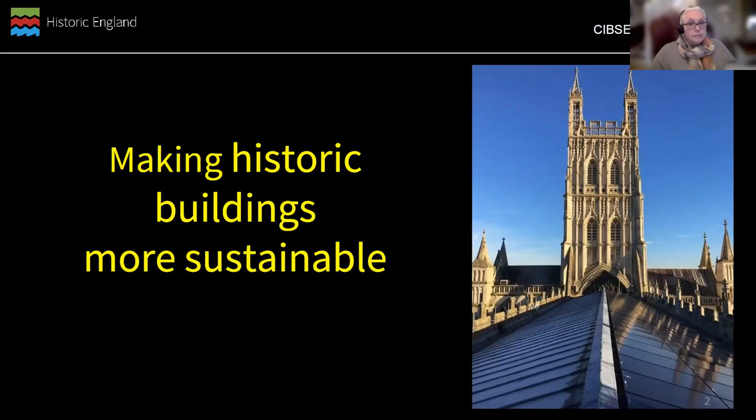The quick fixes can be as simple as changing the lamps in the lighting installation to LEDs. Other considerations, such as the suitability of the lighting design and the age of the installation, should also be taken into account. But this is generally one of the quickest, easiest and most economical alterations that can be made to a services installation that has a positive impact and saves energy.

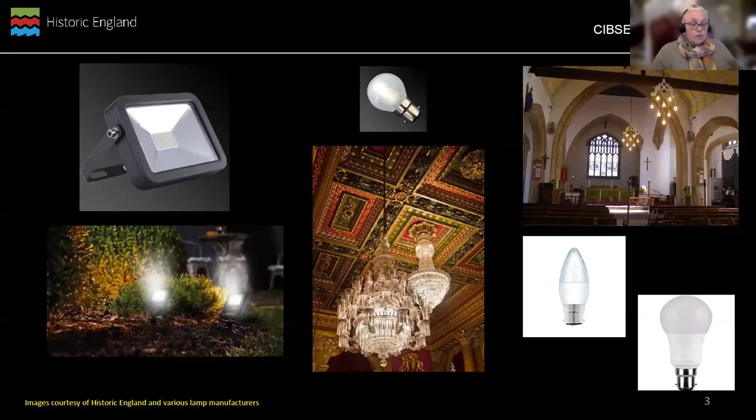Careful thought, however, must be given to where the LEDs are sourced from. As with most things, cheap is not necessarily economical. Some years ago, inexpensive imported LED lamps proved themselves to have characteristics that adversely impacted some people, and sometimes the issue was as simple as having a shorter operating life. There are people sensitive to the imperceptible flicker that some LEDs have. This can cause migraines, nausea, and is not something that can be seen with the naked eye. Instead, the non-visual receptors at the back of the eye detect the problem. It was found to occur more frequently with cheaper LED lamps. This was becoming quite an issue for some churches when they started to install LEDs and were losing congregation numbers because of it. So, purchasing LEDs from a reputable supplier became the standard advice in the early days.

The win is even greater if the electrical supply to the building comes from a sustainable source, potentially including that of the building's own photovoltaic panels.

Yes, a lot of listed buildings have photovoltaic arrays on their roof. Historic England have never been against these. We normally ask that they be concealed from the main views to the building and not installed on the main elevation. Grade 1 listed Gloucester Cathedral has them as one example, as shown on the right of this slide, as part of their Project Pilgrim works.

There were, of course, other considerations to this sort of installation, such as ensuring the often centuries-old roof has the integrity and strength to take the load of these panels, and that there is no imminent need for roof repairs. Also, there must be safe maintenance access to the panels and a suitable home found for auxiliary equipment within the building or adjacent structures.

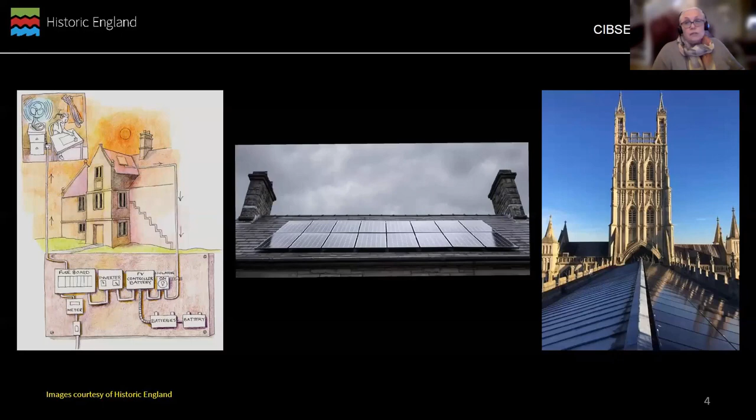Heating is another major consideration and the one that has the potential to be far more complicated and problematic. Gas and oil-fired boilers supplying a wet radiator system are a favourite form of heating in this country.

These types of boiler are, however, falling out of favour as climate change becomes ever more of a factor when deciding which technologies to use and when you replace heating systems as they come to the end of their working life. In a lot of remote places, you will often find listed churches and houses where oil-fired and LPG boilers have been the only option for many years, as the national gas network never extended out to their locations. Replacing one oil-fired boiler with another is now not the first option that should be considered, due to both the Church of England's decision to be carbon neutral by 2030 and the UK's by 2050.

So what are the alternative options available in such cases? In addition to PVs, which could be used to supply electric heating, the grid is rapidly becoming carbon neutral, and according to the National Grid Electricity Systems Operator's Report, it should achieve that in just 4 years' time. So consideration of electric heating is one option, either by electric boilers or other forms of direct electric heating, such as storage heaters, radiant panels, etc., depending on how the building is used. However, there's no point in heating a church 7 days a week when it is only used every second Sunday of the month. Also, systems such as radiant heaters will only warm organic materials, humans included, and not the building, so there may be issues with condensation and damp in the long run.

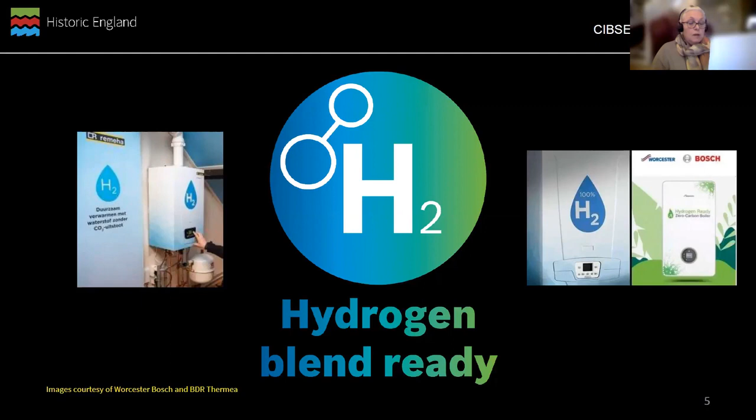There are also ongoing discussions as to which is the better form of hydrogen, be it produced by thermal chemical processes, which use methane in natural gas with a byproduct of carbon dioxide, or when it is produced by the electrolytic process using electricity to split water into its component molecules of hydrogen and oxygen. The first is referred to as blue hydrogen and the latter green hydrogen. Many people are now considering that blue hydrogen is not a true green alternative.

Next slide, please. There is, of course, heat pumps to consider. Whether air, ground, or water, they are becoming a popular option, sometimes needing a small boiler as a backup, depending upon the application. Churches are, in a lot of cases, amending their traditional layout and removing their pews and installing underfloor heating, for which heat pumps are a suitable heat source.

These alterations are often because churches are employed for more additional non-ecclesiastical uses these days, and often need a more flexible internal layout to allow that to happen. These are often musical concerts, plays, creches, indoor farmers markets, and yoga classes, amongst others.

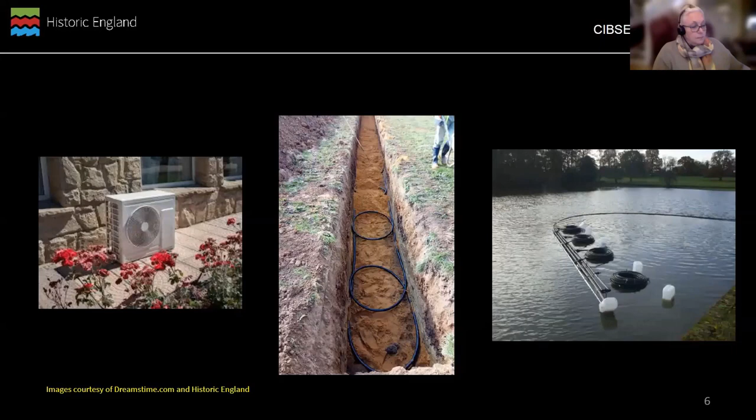Next slide, please. As long as a building remains in use, it can be employed, as we see on the right-hand side here, which is the Shrewsbury Flax Mill, which is being converted into offices. Otherwise, it will go shortly into decay, as shown on the left building, and will rapidly probably have to be pulled down. So it's in all of our interest to keep heritage working for us, and building services helps to make the suitable changes to the building to enable it to go forward into the future for everyone to enjoy.

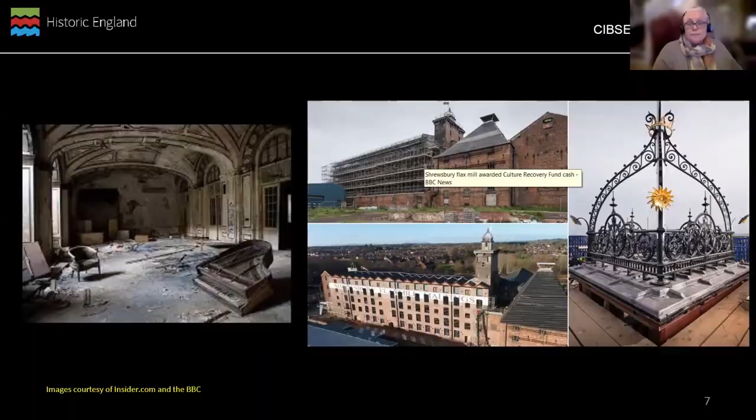Thank you. Thank you very much, Geraldine. It's really interesting to learn the church set itself a net zero goal by 2030, and to understand in the context of historic buildings just the challenges that face them. So I'm sure there'll be many questions coming through for you.

So now we move on to Tina Fawcett. So Tina, please, can you share your slides? And while Tina's doing that, I will introduce her to you. So Tina Fawcett is based in the Environmental Change Institute of the University of Oxford, and her research concerns energy use by households and organisations.

She uses a multidisciplinary approach to understand current use patterns and to identify opportunities and policies for reducing energy use and carbon emissions. She leads the Policy and Governance theme in the Centre for Research into Energy Demand Solutions, CREDS. Her research work within CREDS focuses on policy for further, faster and more flexible delivery of energy demand reduction, particularly in relation to the energy use of buildings.

She also works on the Energy Superhub Oxford, a large demonstration project trialling smart local energy systems, Benefits, a project on the multiple benefits of energy efficiency for businesses, and the EPSRC network for the decarbonisation of heating and cooling. Tina, thank you for giving us your talk.

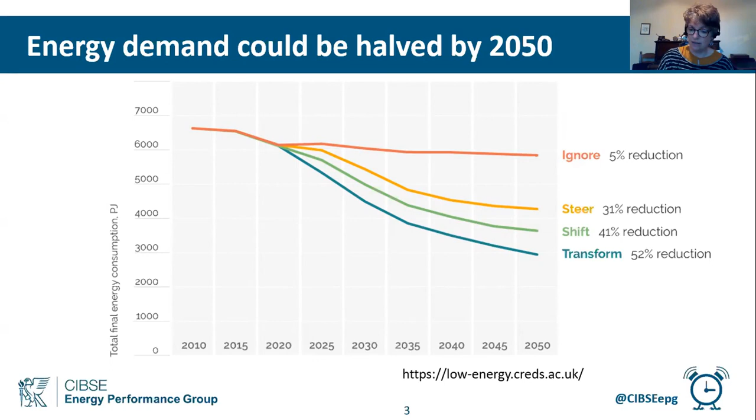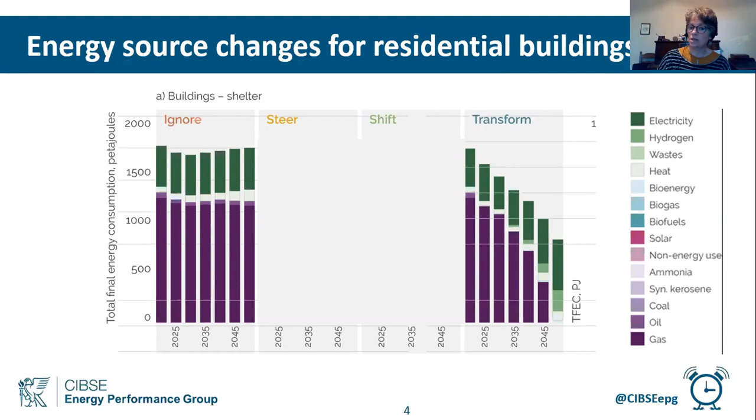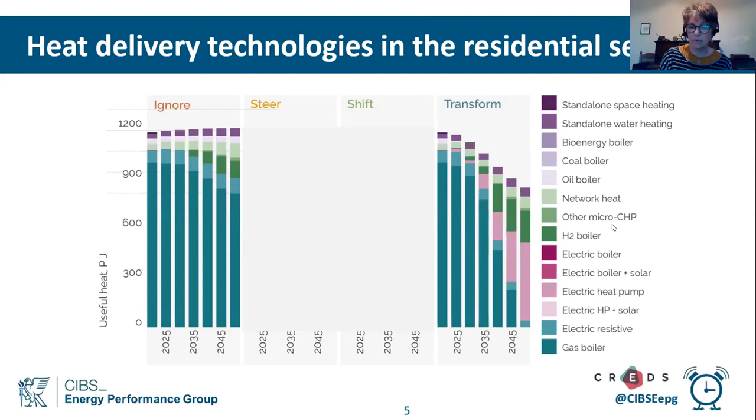So as you can see, it's seeing big changes in the technologies as well as changes in the total amount of energy that's needed to provide the services people need. And there's a great deal of detail in these reports. I must say I didn't do the modelling myself, so I don't know all the numbers, but there's a great deal of interest in that report, and I would recommend going to the website to have a look at it.

Now, my second piece of research I'm going to talk about is on a totally different scale. This is research that myself and some colleagues did with the Federation of Master Builders. And here we were looking only at energy retrofit in UK homes. And we're particularly thinking about the small builders and businesses that do most of the retrofit, or could. And we took a market transformation approach to the analysis. And you can see I've listed there where the report can be found.

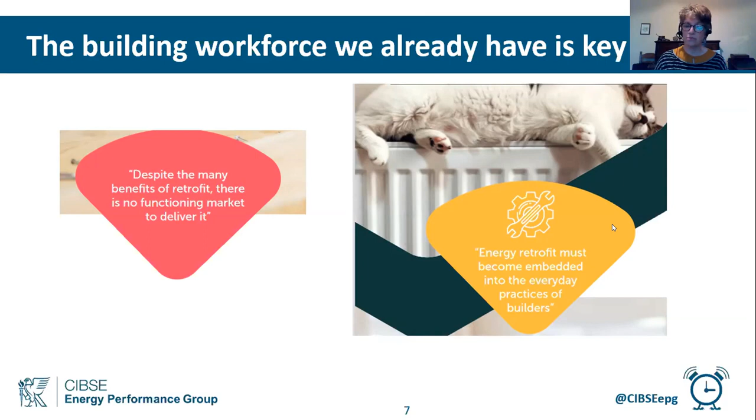And so by looking at the market as it is, this is the conclusion we came to. Despite the many benefits of retrofit, which I probably don't need to tell this audience, there's no functioning market to deliver it. And our hypothesis is that to change this, retrofit to reduce energy demand must become embedded into the everyday practices of builders, and that's the building workforce we've already got. And that was the approach that we were taking in the report.

I should say that the report was led largely by an academic and practitioner team. Very importantly, towards the end, when we'd got a set of draft recommendations, we had a workshop with a selection of master builders from the Federation of Master Builders and got them to sense check what we were saying and to agree or disagree with us.

And then towards the end of the report, we started talking about policy, what needs to change to get to this vision where energy retrofit is in a well-functioning market and it's part of everyday practice for the building firms, and that they are able to do that work. And this is a quote from a master builder: "We've been put off by stop-start policy schemes. They're too risky for a smaller firm. However, we do want to get more involved in this market." So there's a positive and a negative there, really.

And I think as many people will say, we know there isn't one simple thing you can do for policy on housing retrofit. It's going to take a joined up approach. It's quite complicated, but it doesn't mean we can't do it. So if we think about elements of a successful retrofit strategy, quite a lot of this is, I think, familiar, but it still needs saying because we're still not seeing it. And we certainly weren't seeing it in the strategy that the government has just put out, sadly.

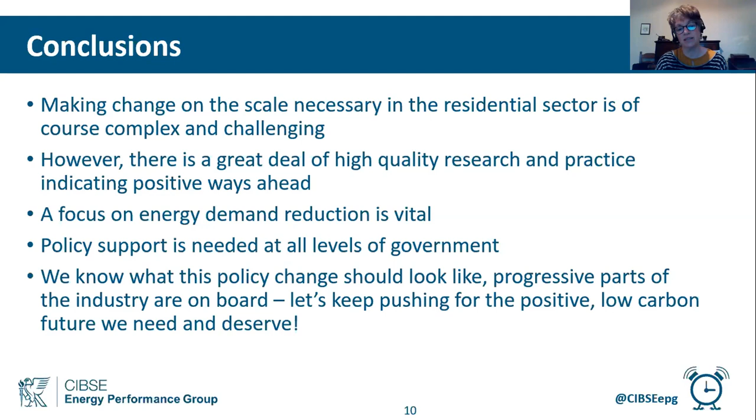Matthew Mapp is a whole life carbon specialist who leads Sweco UK's embodied carbon offering. Sweco is a multidisciplinary built environment design consultancy with service offerings across Europe. With a climate science background and 7 years working at Sweco, Matthew is dedicated to changing the way in which we think about materials in buildings and works with forward-thinking clients to push the boundaries of sustainable design, construction and operation to work towards meeting our climate goals. Matthew has recently been task group chair for the UK GBC's Net Zero Carbon Roadmap Task Force. Over to you, Matthew.

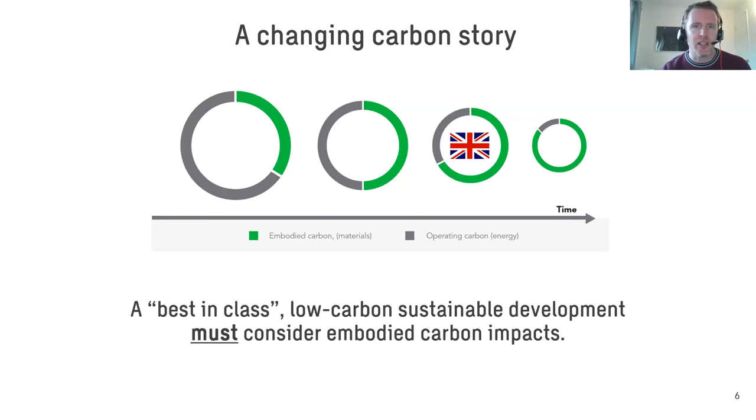However, due to significant steps taken to reduce operational emissions, particularly in the last decade, we've now arrived at the second from the right, where although whole life carbon emissions have overall decreased, embodied carbon is now actually the dominant force. So in reality, a robust low carbon development cannot claim to be so without addressing embodied carbon emissions as well. So how do we actually go about reducing whole life carbon emissions?

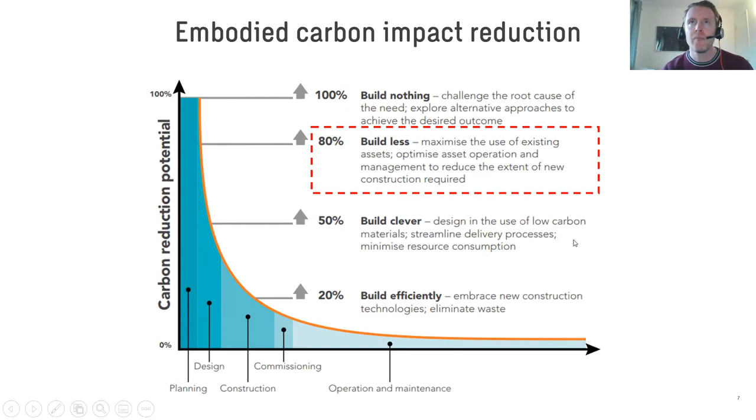Well, there's a hierarchy approach you can see here as set out by the UK GBC, which shows the key actions needed to reduce embodied carbon emissions. One of those key factors is actually to build less, to make use of existing materials to lower embodied carbon emissions. This consideration is also reflected in industry targets.

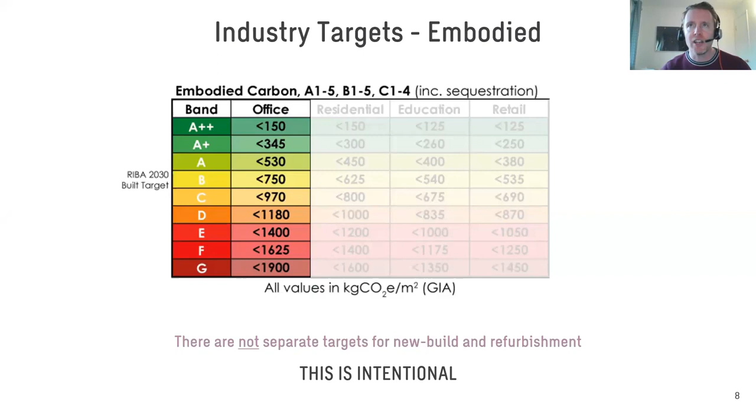In the context of this talk, it's critical to note that there are not separate sets of targets for new build and retrofit. This is intentional, and I'll show you why now. So let's start with a new build.

This is a 60,000 square meter commercial office development that I've undertaken a whole life carbon assessment on. Fairly typical materiality, low carbon aims, but a baseline impact of 1,154 kilograms of CO2 per meter squared. Now, this is considered fairly standard and would probably align with a D rating on the previous slide.

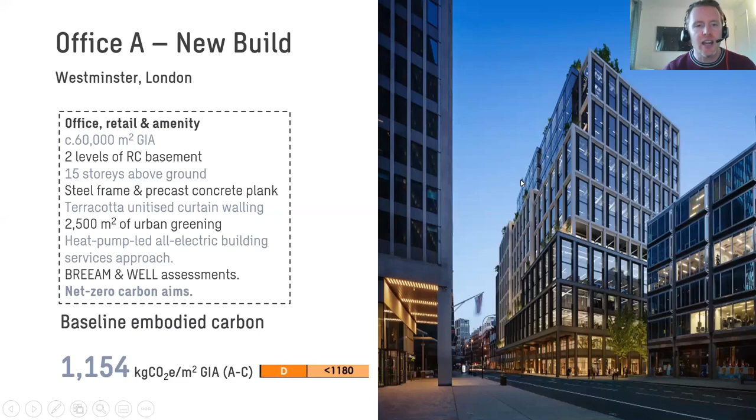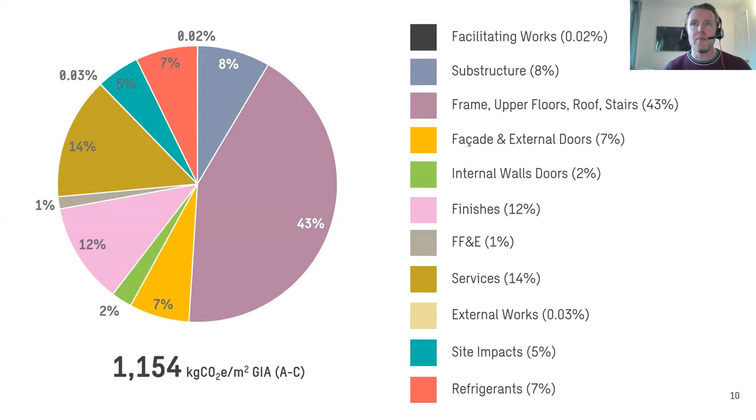Now, this is consistent across most of my office projects in my portfolio, and is actually due to common materials such as concrete and steel, which have high embodied carbon impacts. Now, I want you to keep that weighting in mind as we move through into the next section.

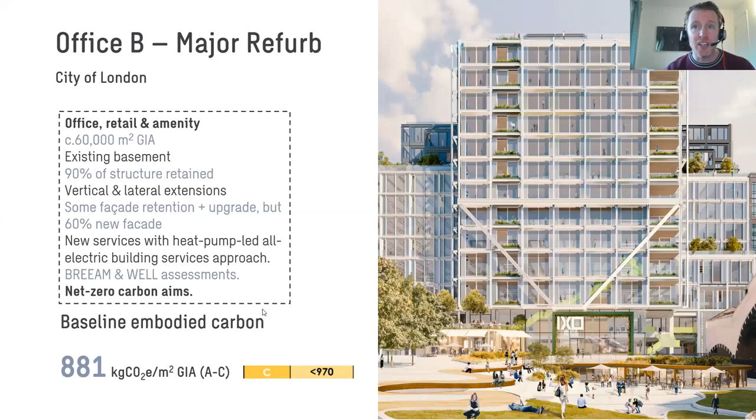We're almost 300 kilograms lower than the new build without doing anything other than retaining the majority of the structure. This would now be a C rating under the benchmarking system, so immediately better than the new build.

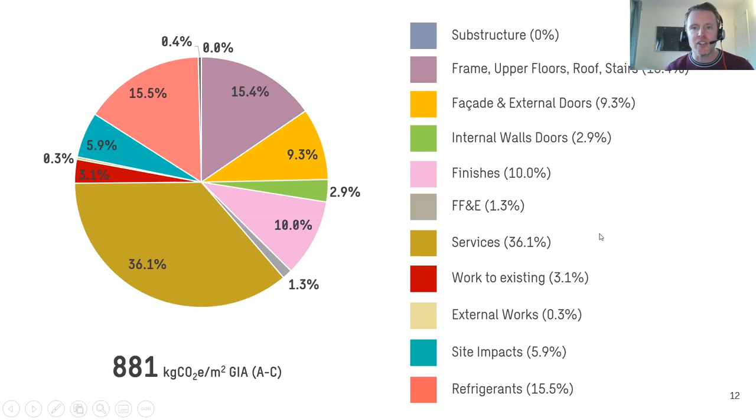Now, it's quite clear in that example that retrofit achieves a significant embodied carbon reduction at baseline stage. And that's why industry targets were set out like they were, to encourage that. But this has also been picked up now in London, particularly by local authorities, which have heard this talked about and really want to push the retrofit agenda.

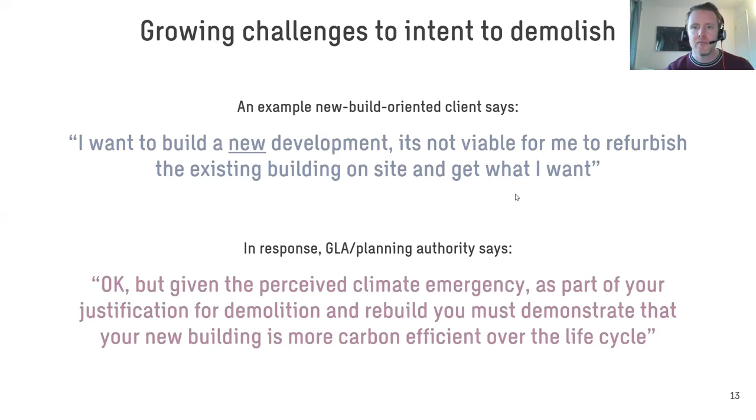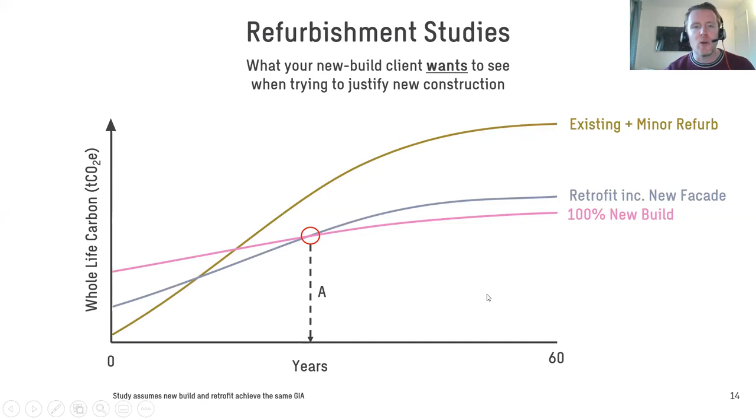So to justify a new build, your client is really looking for point A, the point at which your new build becomes more carbon efficient over its life cycle than the retrofit. But is that actually the reality of what we see? My recent experience says not usually, and this is what we usually see.

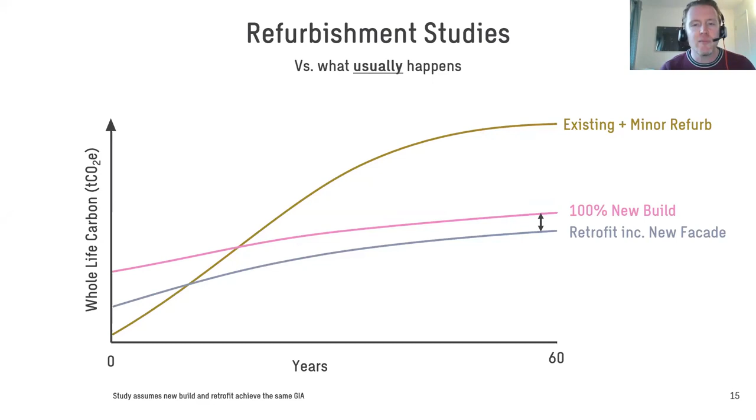If significant steps are undertaken to upgrade facade and services systems, often the lines never actually meet. This, however, is highly contextual, and there are a myriad of constraints and difficulties with retrofit not captured here. That's why you undertake such a study on a building by building basis. This is not a one size fits all approach, but it's a clear demonstration of whole life carbon emissions of retrofit versus new build.

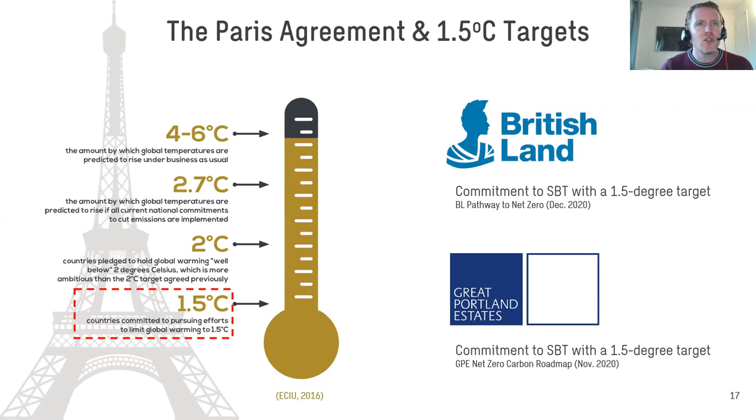So finally, I want to talk about CRREM quickly and the issue of asset stranding. Many of you will be aware that clients and developers, many of those I work for, have strong climate commitments to address climate change, in line with the Paris Agreement's 1.5 degree trajectory. This is something I feel gets bandied about a lot, but it's rarely ever contextualized, so I'm going to try and put this into context of operational energy and retrofits for you.

CRREM is the Carbon Risk Real Estate Monitor. One of the key things we use it for is to assess stranded assets. A stranded asset is a property that will not meet future energy efficiency standards and is at risk of early obsolescence. That's really key to understanding this.

Critically, if this stranding happens within a typical commercial lease cycle of 10 to 15 years, is there any point in undertaking the refurb in the first place? So what happens if we improve energy use intensity to 120 kilowatt hours per meter square per year? The stranding point now happens further along, beyond a typical lease cycle of 10 to 15 years, initially making refurbishment look more viable.

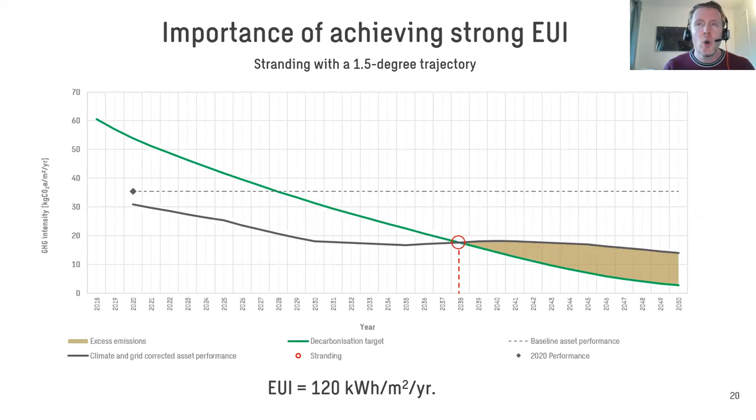But what does it actually take to get to 120? Very likely significant intervention in facade and services to achieve this metric, all at a cost of embodied carbon, which this graph does not show.

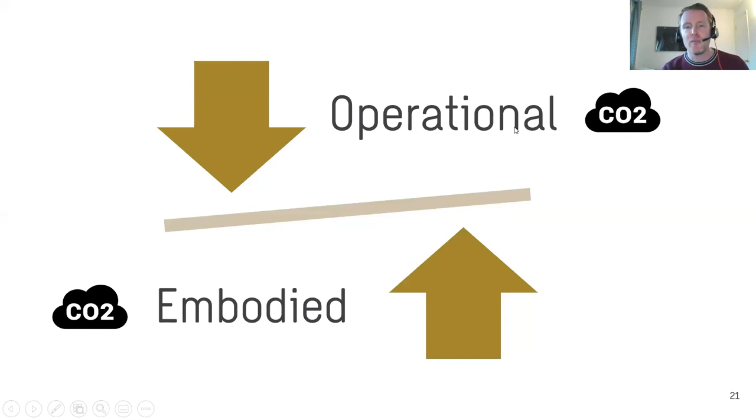So finally, we're back to balance. A whole life carbon assessment is a really critical component of our decision-making process on whether retrofit is the best solution from a carbon perspective, because without considering it in the round, you cannot make an informed decision. And that brings me to a close. Thank you very much for your time.